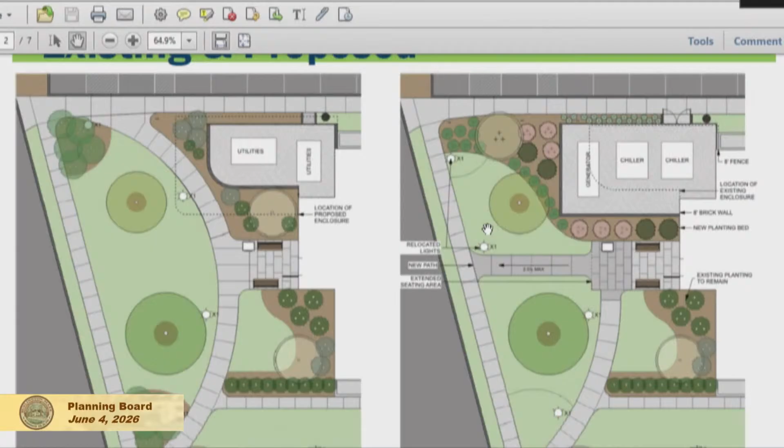The generator is currently up against the building. If it were to remain there, we'd have to bring an exhaust standpipe all the way past the roof line. If we flip-flop it with the existing chiller unit, which is in the brick enclosure right out by the side door, we're far enough away from the building that we don't need an extended exhaust pipe, and we can keep all the equipment hidden.

Knowing the equipment and code sizes changed, we realized we either have to increase the size of the enclosure or try to relocate one or more pieces of equipment elsewhere to minimize or keep the same enclosure space, or shrink it. So we did try to look at moving the generator.

The only viable option we could come up with is out back in the rear of the parking lot. However, there were some impacts with doing that. We would lose several parking spaces, but the main driver is the increased sound to the neighboring residents. We had a sound test done with the existing generator to measure the sound levels out back, to see where it would make sense to relocate it if we were to move it there.

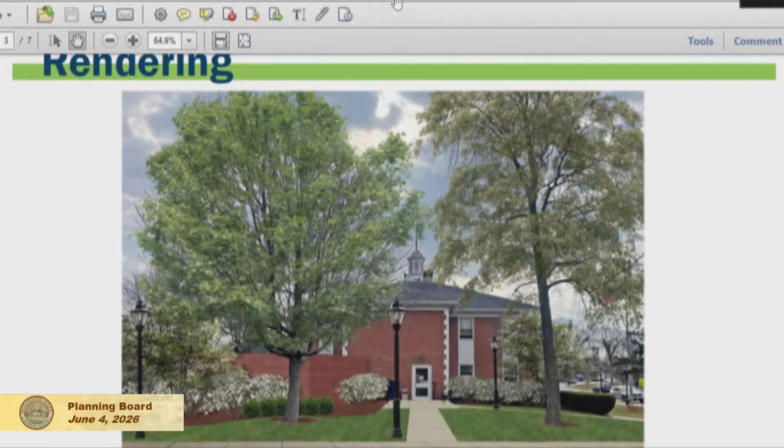Currently, the sound levels at that location are about 50 decibels. If we were to move the proposed generator back there, the new generator at that spot would be about 75 decibels, roughly a 20 to 25 decibel increase, which is actually 4 times as loud. For comparison, the difference from 50 to 70-75 decibels is roughly the difference between moderate rain and a vacuum cleaner. So it's a pretty significant increase in sound.

Because of that, we resorted back to what we think is the most logical place that impacts residents the least: keeping it where it is and increasing the size of the enclosure. The enclosure itself—obviously there's a walkway right up against it, so there's not much room to move it closer towards Center Street because of code restrictions with where electric panels are and whatnot.

If we go to the other direction, it's right up against the sidewalk back here, so we would be taking away sidewalk or encroaching into the parking lot.

So really the only direction to enlarge it is further out closer to Dearborn, and that would impact the walkway that leads from the chair ramp at the parking lot to the side door.

So we looked at a couple different options. One option, which would be more ideal for accessibility, would be to try to keep the shortest path, relocate the sidewalk to try to keep it where it is currently, and wrap it around. If we were to do that, we would likely have to remove the large maple that's out there.

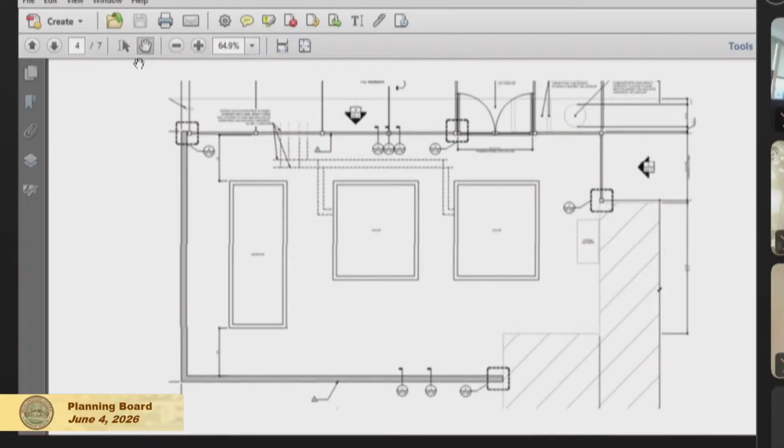Summarize it. We should probably introduce our landscape folks. Yeah, who do you want unmuted? Rory, please. Rory?

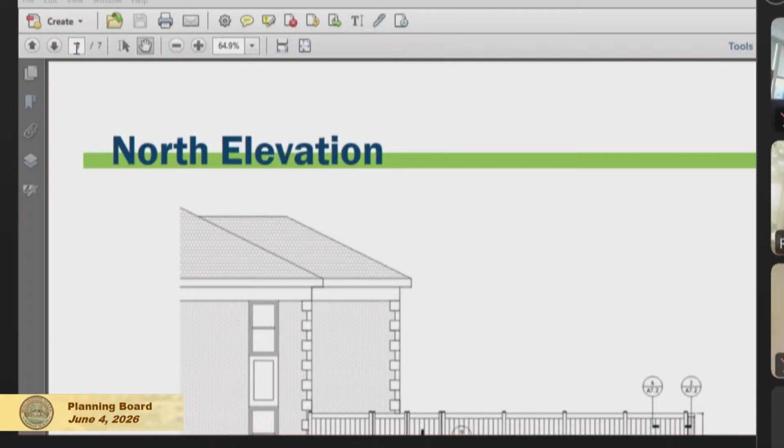Okay, hi, I'm Rory. I'm with the landscape architects on this project. If you want to go back so we can look at the two plans we have, I can just walk you through how we ended up at this design.

The most important things we wanted to preserve with this plan - we have the existing conditions on the left and the new layout on the right. As was stated, having the straight path, still an accessible path, access from the parking lot, and then a straight run to the side door entrance seemed the most logical, and that allows us to preserve that existing red maple tree, which is a very established and great tree.

That also gives us some space to add some additional planting to screen the large enclosure around the utilities. That planting will also help guide people to walk along the sidewalk instead of across the lawn, then straight to the side entrance.

So it's pretty straightforward, pretty simple. As far as the planting, we are just seeking to match what is existing, so this will all blend into the existing landscape as seamlessly as possible. And then we're just taking out some of the larger overgrown shrubs that are down at the corner of the sidewalk.

That's just a best practice thing to keep visibility at those intersections, and that's pretty much it as far as the landscape is concerned. We're just repurposing the lampposts that were along the old path and moving them to now be in line with the new path, which you can see in this rendering here. So I think that's about all I have as far as landscape goes.

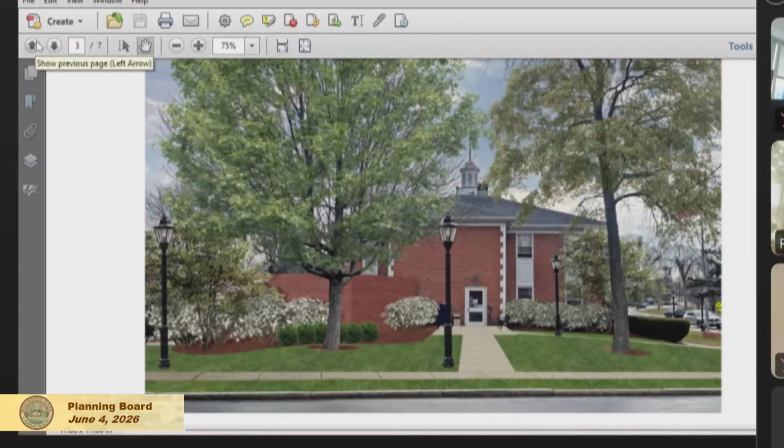One small thing to add: part of the reason why we are removing the bushes on the south of the plan is because those are invasive - burning bush - they're considered invasive, so that's why, even though they're not directly impacted, it's just best practice.

So it's again a pretty straightforward plan. One thing the board should be aware of is that this is in the town center overlay, and so there is a design component to this, and we've been working with Brian and his team for a few months now, and it's been really great collaboration.

I think they've come up with some really great materials, and the choices are really good. So if you guys want to talk about the materials and what you're planning on using.

Can I stop for a second? So what's the final rendering going to look like aesthetically, if I'm standing as a person not looking at one of these maps—which one am I looking at? Is it this? No, that's existing. I'll share it on screen. It's going to be the view, the third page in your packet.

Okay, so it'll be flush, like brick colored, comparable to the building. Okay, thank you. Yep, so we worked on two other design considerations.

For a while, without digging into the plans and existing site conditions, I wondered why there was a steel wall for the rear portion of the enclosure. Our initial intent was to try to make the whole enclosure brick to match the building as best as possible.

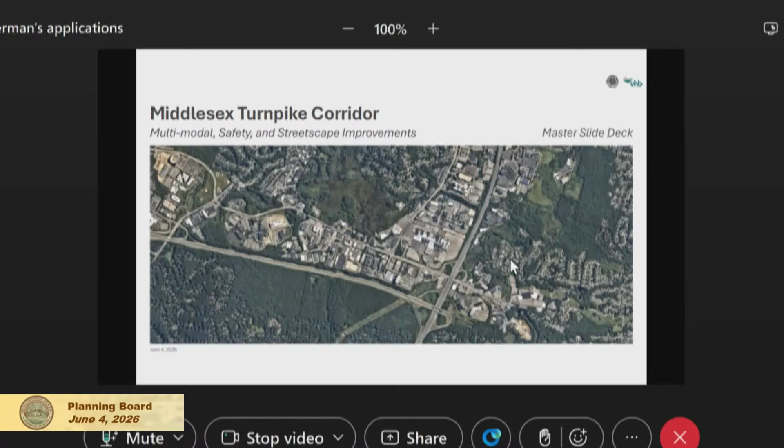With that, what we want to look at in terms of this project is really about the economic infrastructure that helps us remain competitive into the future. The roadway is not just asphalt. It is a public realm that can invite investment, support existing businesses, and help residents and employees get around, connected, have it more walkable.

So with that, today we have — I'll go everyone's first name on the VHB team real quick — we have Evan, Wayne, Jason, and Kristen, and a whole team that has been working really hard. I want to honor their work, because you'll hear a short presentation, relatively speaking, compared to the research and thoughtfulness that's been put into this effort.

What we're hoping for you guys today is, as you're thinking about this and hearing the ideas and concept, to consider: is this the right direction? Because we are looking for this document to set the stage so that we can use it for private and public investment going forward, whether it be grants or guiding development — that's what I hope we can bring to Burlington with this project.

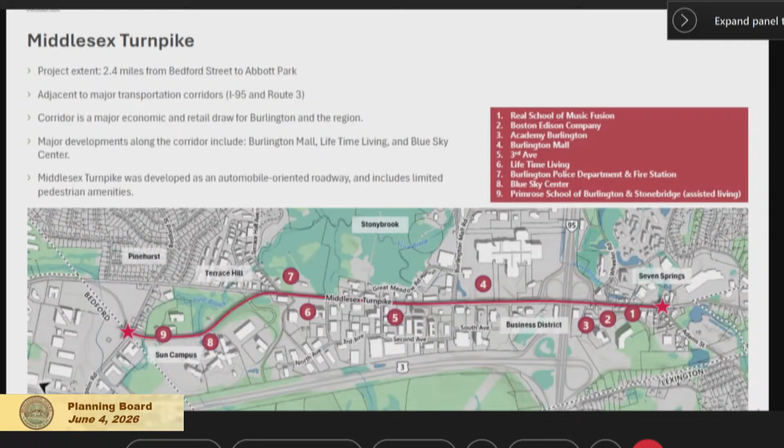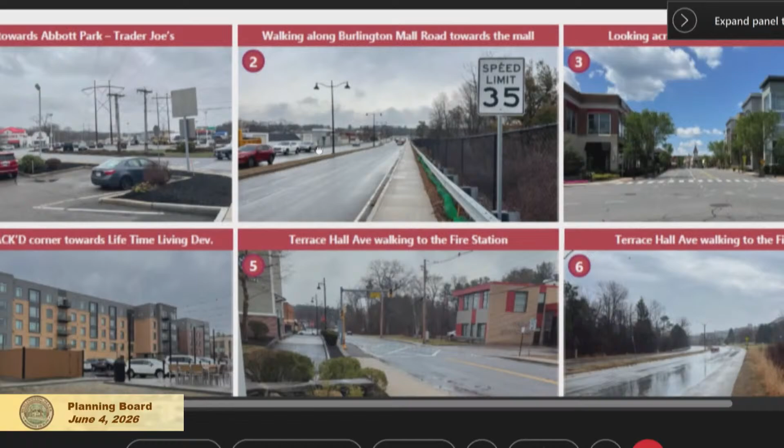The images on the screen show you just some of the current characteristics of the corridor. Points to the south are very confined, with a lot of curb cuts that occur down there, and limited walking sidewalks and availability for that. As we move northward, there has been some new development in that area. And then at the furthest points north, it really opens up and becomes much more natural in character than the urban core that's at the southern portion.

What we were hoping to do, our high-level goals, was to develop a unified vision for the corridor to inform decision-making around future investments and development projects. We want to identify a coordinated set of materials and concept-level roadway layouts that are feasible for Burlington to implement. We want to improve the experience and safety for people traveling by foot, bike, car, and transit. And we'd like to identify short and long-term actions and funding sources to help support the implementation of this project.

This was one of my favorite parts of this whole project, looking at the history of this corridor. This corridor, when it originally came out, was named the Turnpike. So for the longest while, it has been serviced as a movement of people — taking people from one place to the other as far back as 1805. It was created as a toll road from 1811 to 1841.

So this corridor has always been generating revenue in some capacity, whether it's moving people down the corridor or bringing people to a destination as a retail spot. The mall was established in 1968, which makes this start to touch the world — the larger capacity of the state is coming now to Burlington.

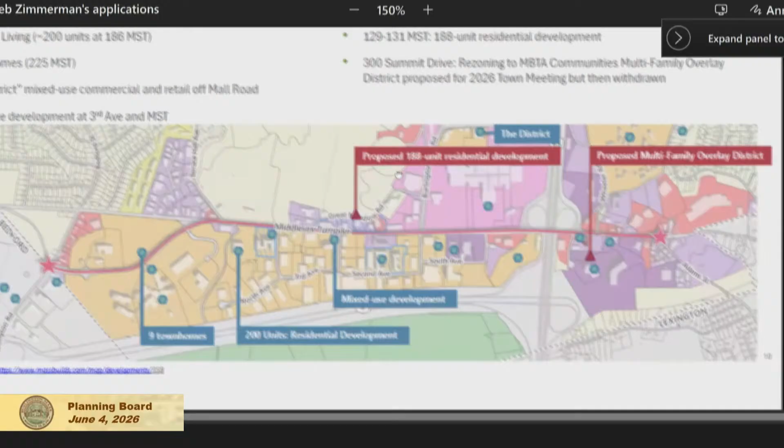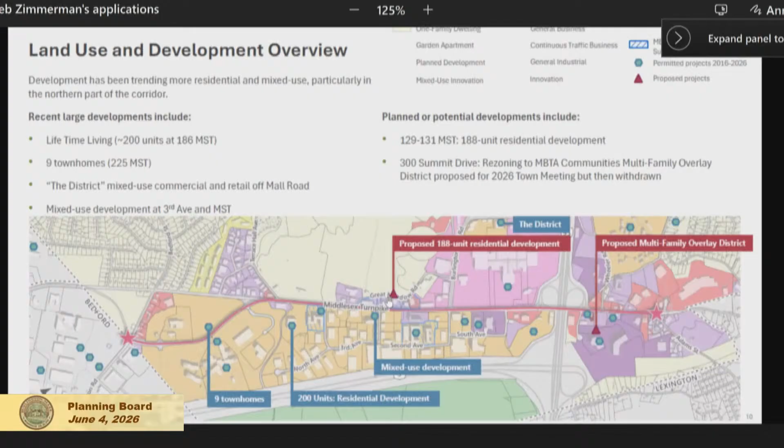The land use out here is currently changing, with a lot of residential coming into this area. Large recent developments include Life Time Living, 200 residential units that have come online, and 9 townhomes. The district, just around the corner, is bringing mixed-use commercial and retail off of Mall Road. We have a proposed 188-unit residential development just off Great Meadow Road, and a potential proposed multifamily overlay district just south of 95. So our once retail-based corridor is changing and evolving, and we want to allow this design to change and evolve with it.

There are some very interesting environmental conditions. This corridor isn't just about a road, but about the landscape it sits on. It's interesting how the slope and topography create, in some conditions, a confined corridor and an open corridor. In some places you have ledge and rock that creates an aggressive slope; in other areas there's a fall-off down to a wetland. That's what makes this corridor unique to Burlington—those environmental features we want to play up, because otherwise it's anywhere USA. Let's think about what makes it unique and play off of those in our design.

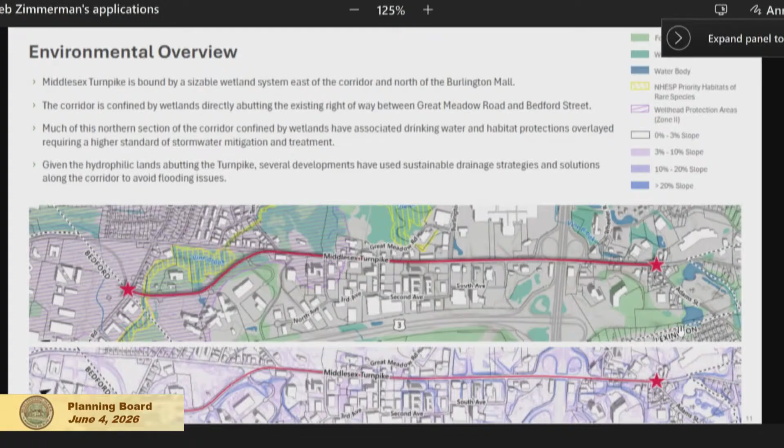Some of the environmental features currently out there include drainage areas, naturalized wetlands, forested areas, and the Vine Brook that comes through here. One of the things I was told early on is to take all your site photos in the wintertime, because any renderings you do will always look better in the end—so that's why these were all taken in winter.

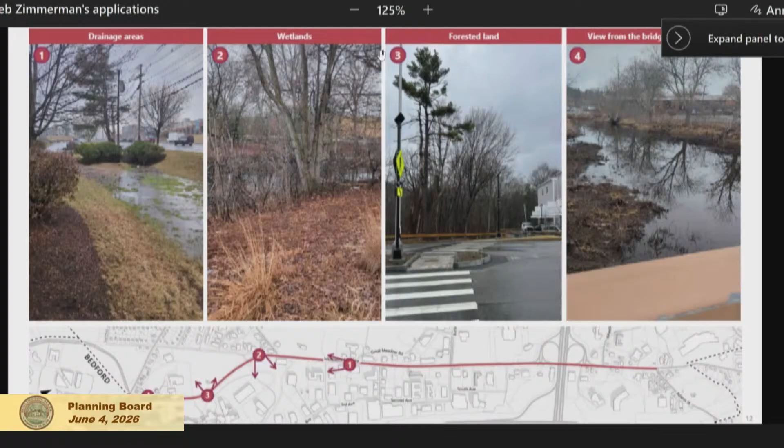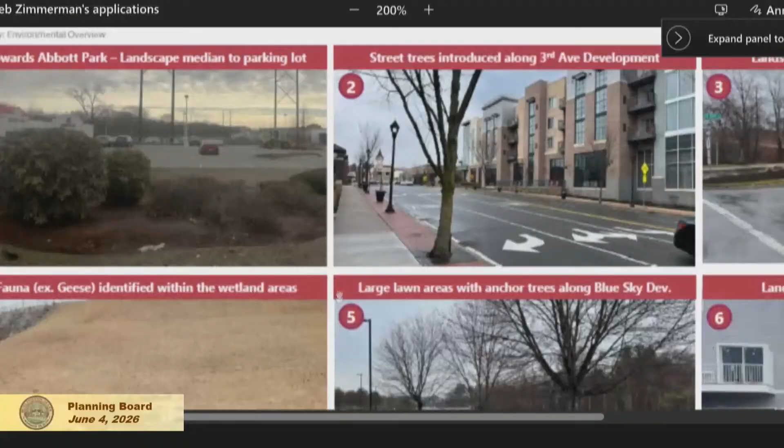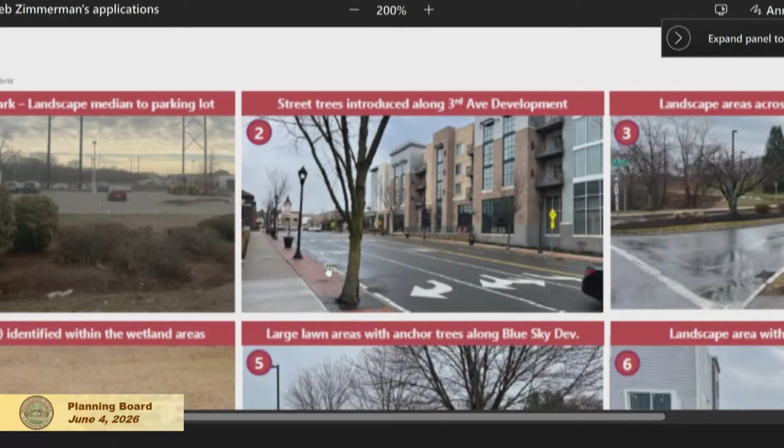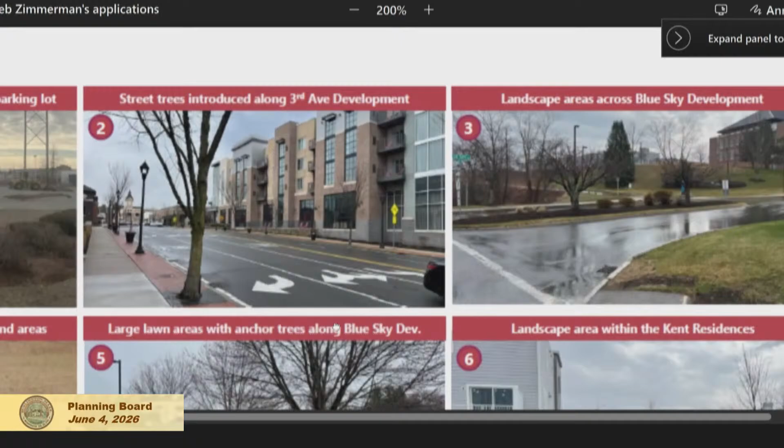These are also some great shots showing the character. Down towards Abbott Park, there are landscape medians in the parking lots. Street trees are starting to be introduced along 3rd Avenue. We have an area in the northern portion with geese—so we actually have natural fauna and animals out here. Large street trees help define areas along Blue Sky Development, and there's some really nice new landscape at the Kent residence.

The other nice thing out here is there's an existing transit network. When you think about buses and transit, that's also a gateway point. So it's not just the vehicle bringing people from one side to the other—when you get off a bus or get on a bus, you have to think about where that person is eventually going, what the infrastructure and sidewalk look like, and the opportunity to introduce them to this corridor and to what it means to be Burlington. So we've inventoried and analyzed that.

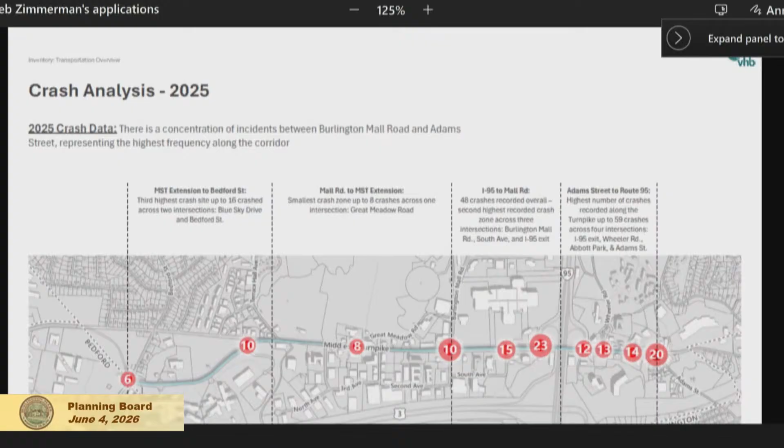We also looked at the crash data in 2025 and really saw that south of Burlington Mall Road, there's a high number of vehicular crashes that occur down there.

Legibility and creating a hierarchy to intersections, making it obvious to the car and the pedestrian where people need to cross when approaching an intersection, can help reduce crashes and improve safety. Part of this is providing a design framework that will help reduce those crashes.

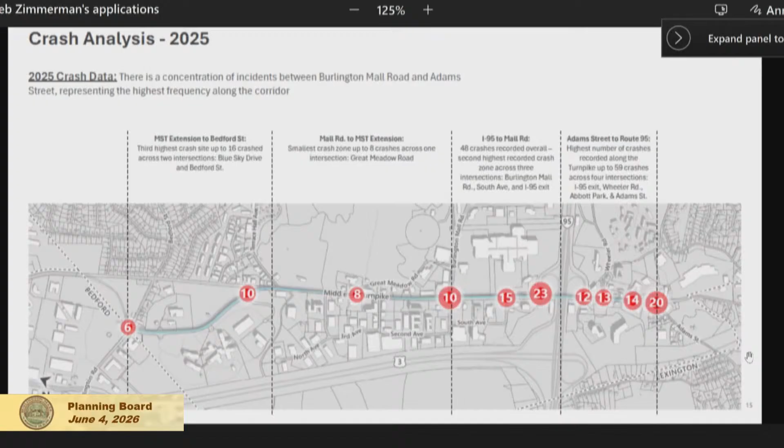The traffic analysis we've looked at shows about 25,000 cars per day south of Wheeler Road, and almost 20,000 cars per day north of Middlesex Turnpike. That's an incredible number of people moving along your corridor that you can take advantage of. It's an opportunity to really let them know what Burlington can be in the future, and what it means to be in Burlington.

We've also looked at the speed along those areas and the volume of cars across time. What we noticed is that the morning and evening commutes start relatively early, which is why lighting, not just for vehicles but for pedestrians, needs to be considered, because in the wintertime it gets dark really early and light really late. So we need to consider what lighting looks like in and around that area.

We also looked at pedestrian volumes. In the summertime, we've got almost 700 people walking along those areas in the current condition of the sidewalks, and we'll show a few photographs of that. There are 71 bicycles, almost 1,000 buses, for total vehicle trips, including everything, of almost 300,000. That drops off in the wintertime, but it's not non-existent. There are still people using this corridor in the wintertime, so we need to design for all 12 months, all 4 seasons.

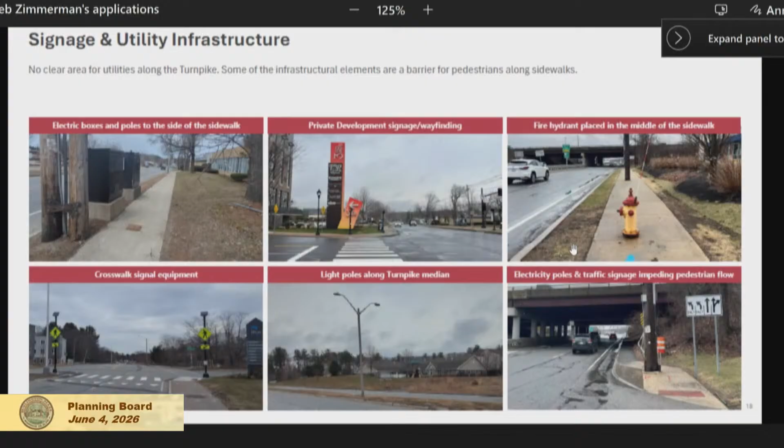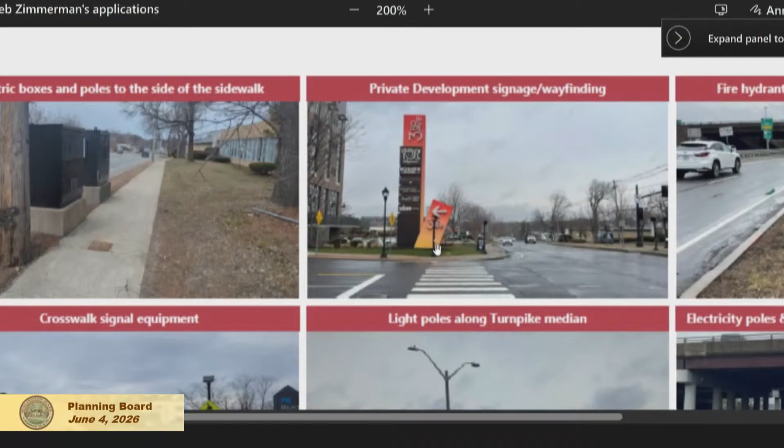We also did some inventory on the signage and utility infrastructure. There's really no clear place to land a lot of that stuff. It's sort of haphazard and dictated by whatever site design occurs at that time. So we'd like to formalize that and come up with a plan to put it in the right spot.

That led to all of that inventory, which we then analyzed as a group set, and we came up with 4 zones that we were really looking at. Zone 1 is south of 95 down to Adams Street. Zone 2 is 95 up to Burlington Mall Road. Zone 3 moves from Burlington Mall Road up to Middlesex Turnpike Extension and Terrace Hall Avenue. The final zone is Zone 4, from Terrace Hall Avenue up to Route 62, Bedford Street. Each one of those areas has a unique design to it.

When we look at designing into the future, you're going to see in our kit of parts a little bit of tweaks along the corridor, but there's going to be a common language throughout that whole corridor that makes it all legible as you move from one side to the other.

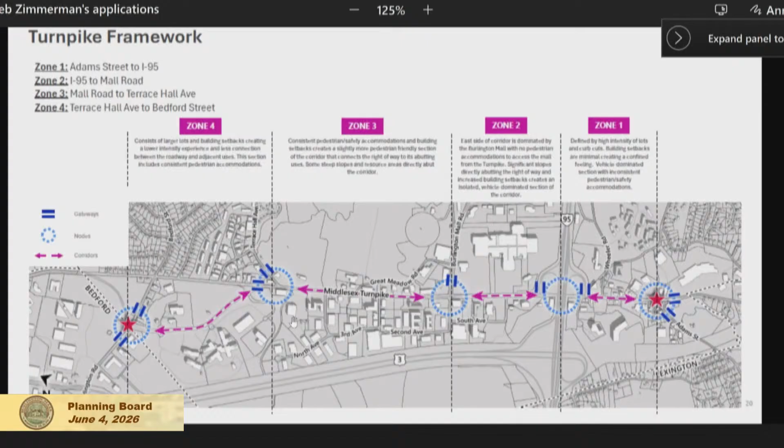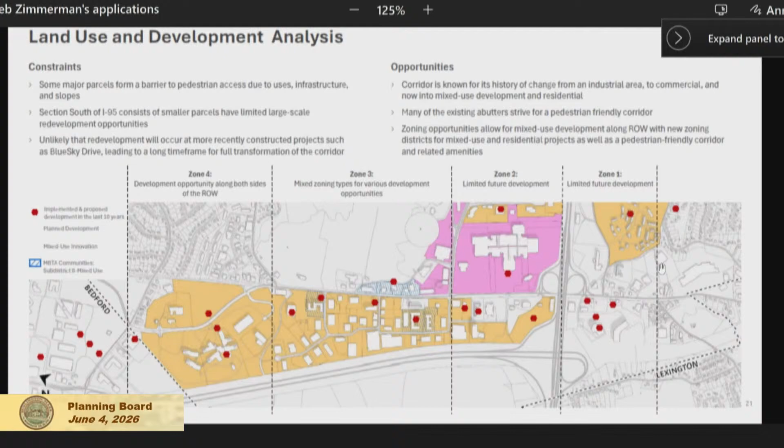We're just inventorying and showing some of the land use and development analysis that has occurred along here. Some of these parcels are large, but are constrained by uses, infrastructure, and slopes. But we have opportunities to play that up and really work with that, which we're excited about. There's also environmental impacts, like very steep slopes we have to deal with, and there's right-of-way currently under wellhead protection zones, all of which will eventually affect the permitting process through here, but we just want to acknowledge that it could also provide some very interesting ways to address that.

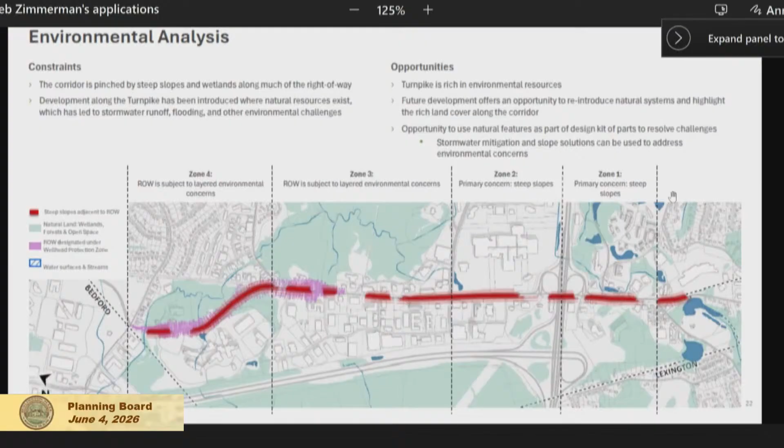And then we did our transportation analysis, which looked at crash speeds and how people are moving and crossing the streets, and where there's legibility for crossing in those zones.

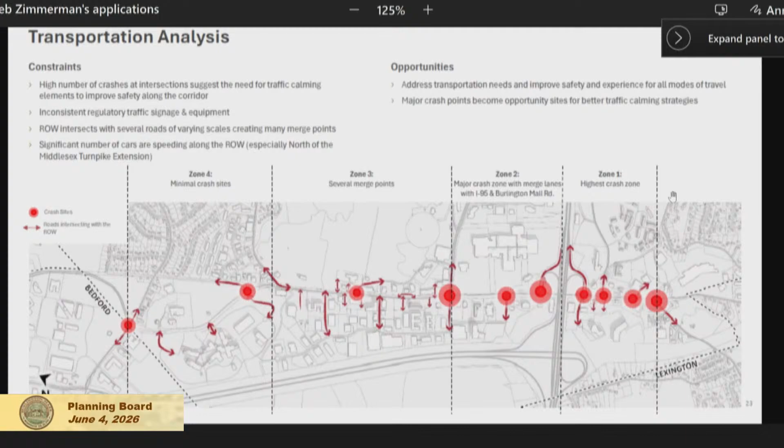We also noted that there's a lack of sidewalk in a lot of areas, especially on the eastern side of the corridor. So we really wanted to see if there was a way to solve that problem as well.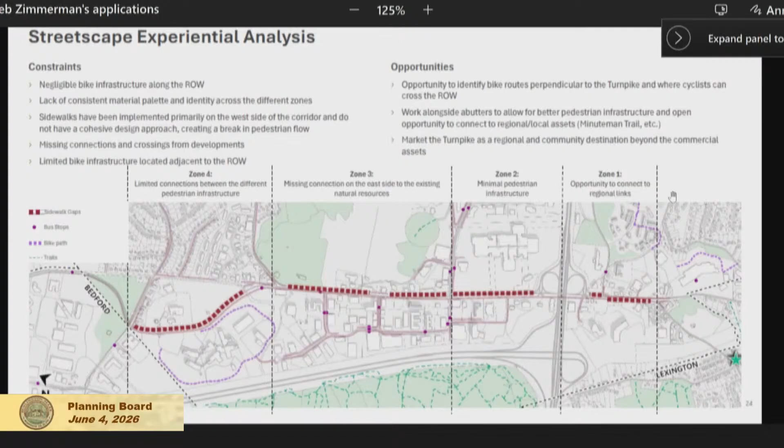That leads us to our master kit of parts, which is our vision over the next two decades for Middlesex Turnpike: to transform the turnpike into a distinctive parkway. I like using that term instead of turnpike - the idea of a parkway that seamlessly connects residential areas to thriving commercial centers through safe, pleasant walking and biking paths, integrated with existing roadway and the area's open spaces. This unique Burlington corridor will become more than a roadway, shifting to a vibrant green connector with recognizable character that enhances quality of life for residents, workers, and visitors, and strengthens Burlington's economic vitality.

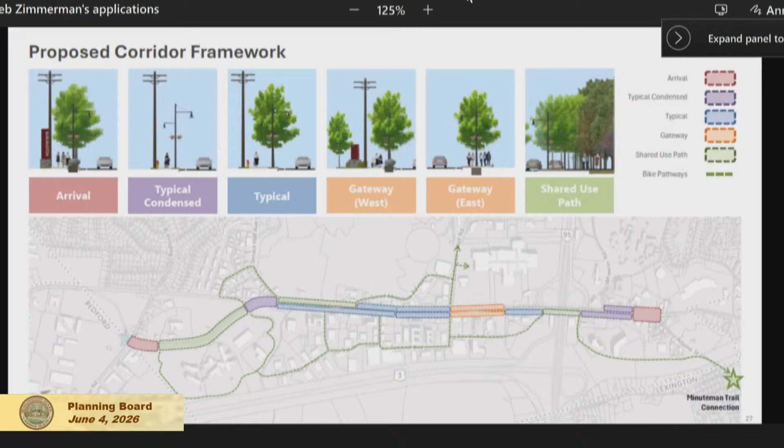So this is the proposed corridor framework. I've got some graphics up on the screen right now. We've looked at this in segments, and we've studied it in cross-section.

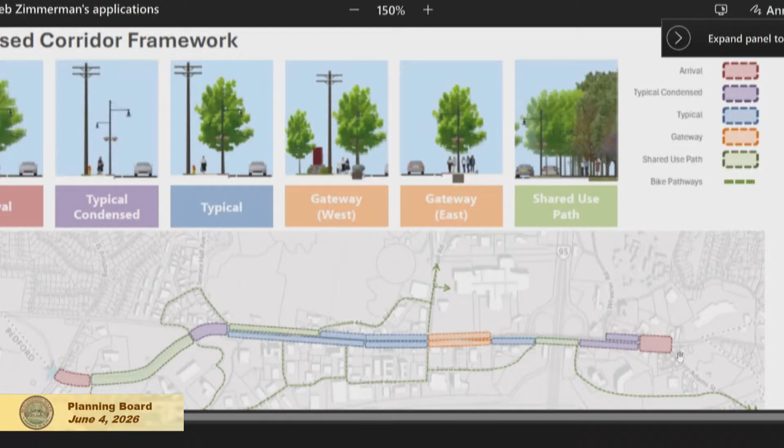At the two ends, at the northern and southernmost areas, we're proposing a cross-section that we call the arrival cross-section. We've been able to design within the existing roadway corridor, but adjusted the width of the shoulders slightly, and we may be encroaching in some areas into the existing right-of-way. What we'd like to set up is some level of gateway signage and a nice plant palette to create some level of passage - you've come into an area, you've passed through it, and then you're moving on to a different area. It establishes the start and the stop of the corridor.

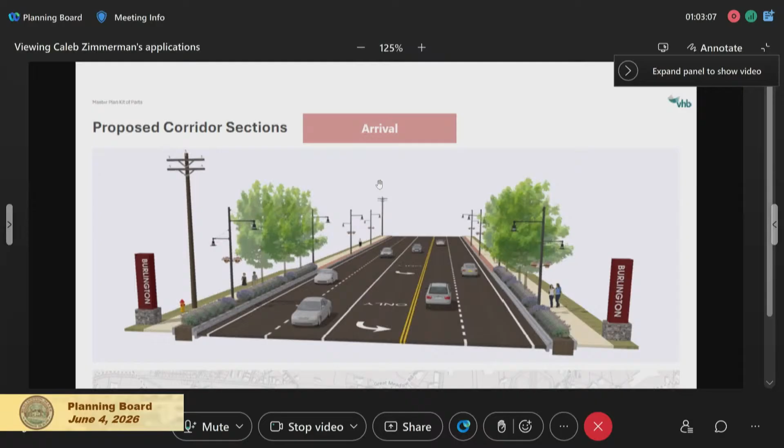In street section, what that looks like for the pedestrian: we're building off a 2-foot wide shoulder, a 5-foot wide planting area, a 6-foot wide accessible sidewalk, and now what we're calling a 3-foot wide utility zone, which in the future, instead of just having utilities fall where they may, we're proposing to dedicate an area that can locate all utilities moving forward.

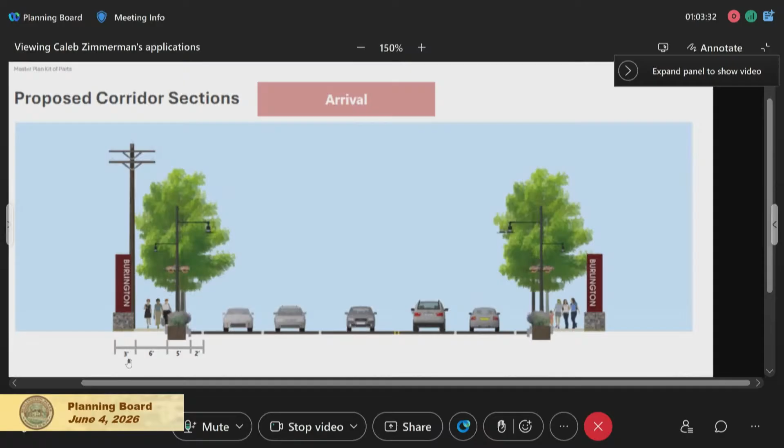As you move out of the entry area, especially south of 95, the existing conditions down there are very condensed. Your parking lots are right up against the roadway, the buildings are right up against the roadway, the slope comes up. It doesn't afford us a lot of opportunity to do extensive landscaping, but it still allows us to use the palette of materials we've come up with to create this consistent vision that moves along the entire corridor.

In this zone, we have slightly less space than in other areas. We still have our 2-foot shoulder, but we've reduced our paver area down to 3 feet. We're proposing a 5-foot wide sidewalk, but we still maintain that 3-foot wide utility zone that we talked about.

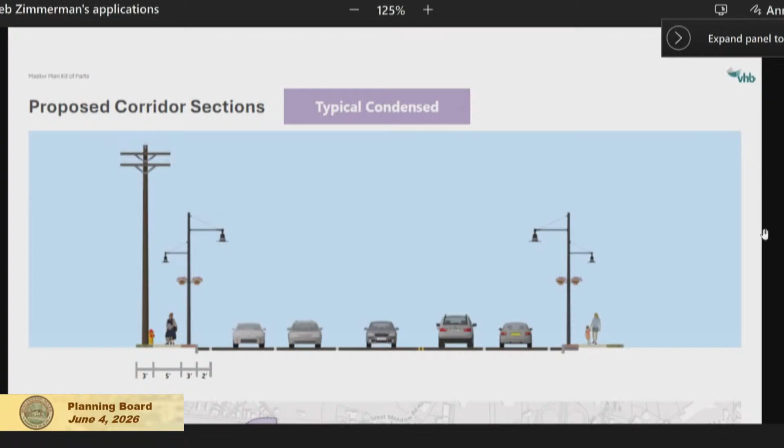Once we come out of that and get a little bit more space, we've created this as our proposed typical cross-section. What do we really want to see here? We want a great edge to the roadway defined by some level of paver or imprint concrete that gives the pedestrian a nice separation from the vehicles moving along. It also gives us an area to land lights, both for pedestrians and vehicles, and to plant our street trees, while also showing the 6-foot wide sidewalk and the utility zone, all while maintaining within the existing roadway corridor.

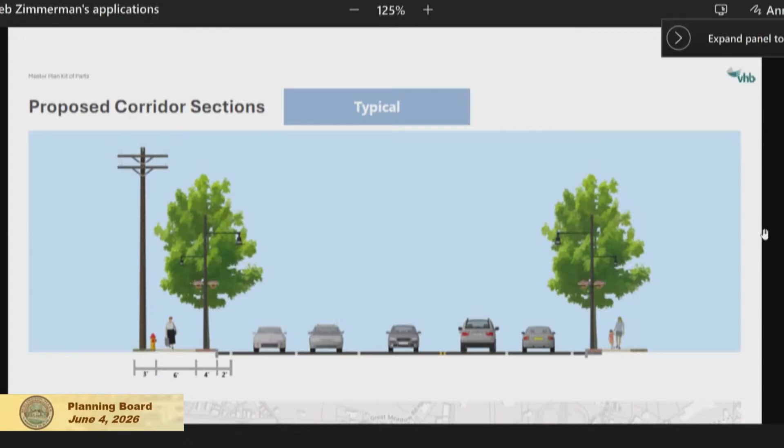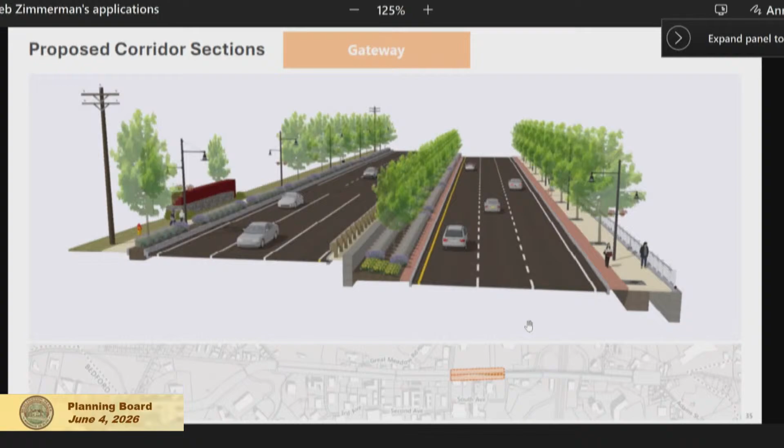This image is showing what that sloped condition can look like. It no longer needs to just be a simple asphalt slope with a retaining wall - you might be able to drop that, introduce some plant material in the center of it with another area for a paver band, which could also help with snow storage along in there.

We have two very distinct looking edges to the roadway. On the left-hand side, where the slope goes up to the movie theater, we're showing a 2-foot wide shoulder, a 5-foot wide planting zone, a 6-foot wide sidewalk, and an 8-foot signage and utility zone. On the opposite side, where the mall itself is, with a little bit of retaining, you might be able to create - where there doesn't exist a sidewalk today - a nice new wide plaza that would invite potential new development into that area, one that now engages the roadway instead of turning its back on it, which is something that currently occurs.

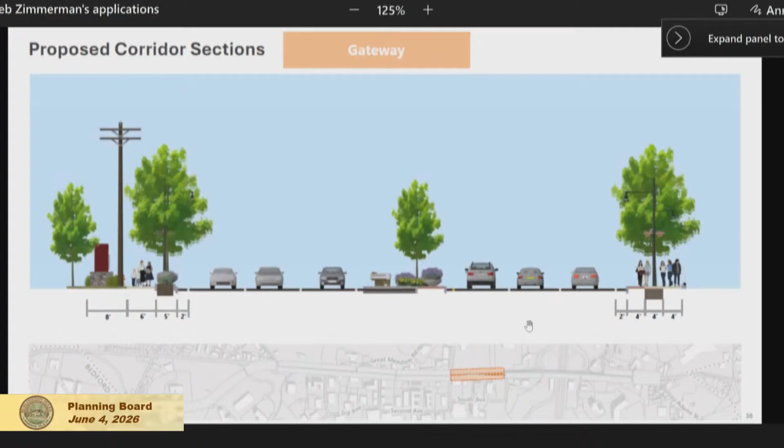As we move out of this corridor and continue northbound up near Blue Sky Drive and the campus up there, the character changes. We become much more environmental. There's much more natural landscape up there. So we've decided to potentially change what the look and experience is up there.

No longer are we binding the sidewalk to the back of curb, but we're taking a bit more land to create a mixed-use path that organically flows throughout that area on both sides. It would engage some wetland areas requiring additional permitting. But by providing a nice mixed-use trail instead of a traditional sidewalk, it would give residents in the surrounding neighborhoods the ability to come in, take advantage of the trail, and loop back into their neighborhoods, so folks not necessarily on the corridor could still utilize it.

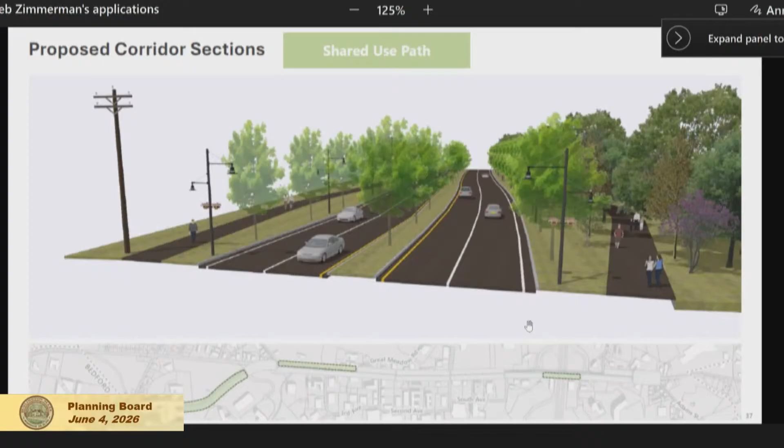We're taking advantage of the land, topography, and natural character up there to change the condition of that whole area. We're still maintaining that 2-foot wide shoulder, now with a nice offset from the road of 8 feet, a 10-foot wide mixed-use trail, and still maintaining our zone for utilities.

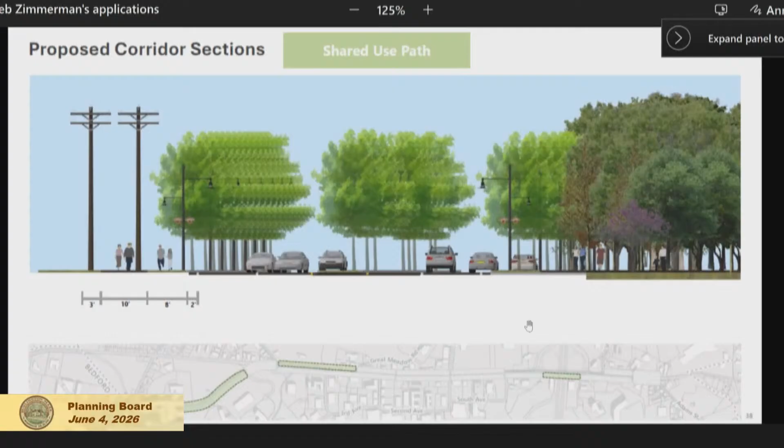Bikes are very important along here, but one thing I missed in the presentation: instead of trying to fit bike lanes right along the roadways, there are some great parallel roads on either side that we could encourage bicyclists to use for a much safer route, maybe going up 2nd Ave and coming back down.

But at some point, you're going to have to get under 95. So we've looked at taking the current sidewalk under 95 and lifting it up to widen it enough to make it a mixed-use path.

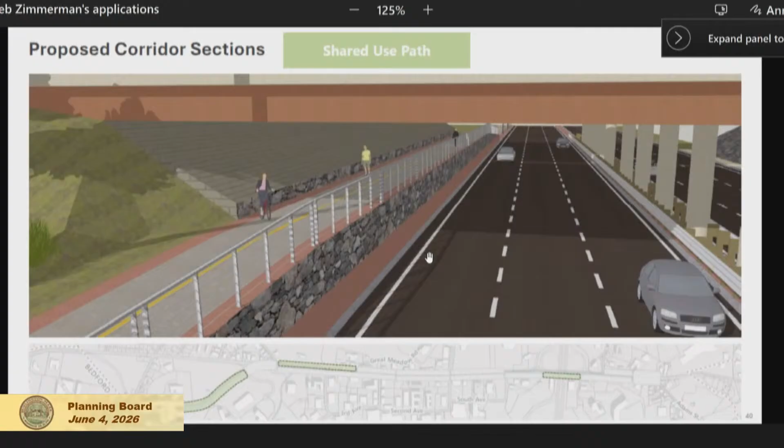What that could potentially look like is on the screen right now. By lifting it up and pushing it back into the slanted bridge abutment, it gives us a little more space to widen it to a 10-foot wide trail with 2-foot wide shoulders on either side, all while maintaining a 10-foot wide clearance from the bottom of the bridge abutment down to the top of the trail itself.

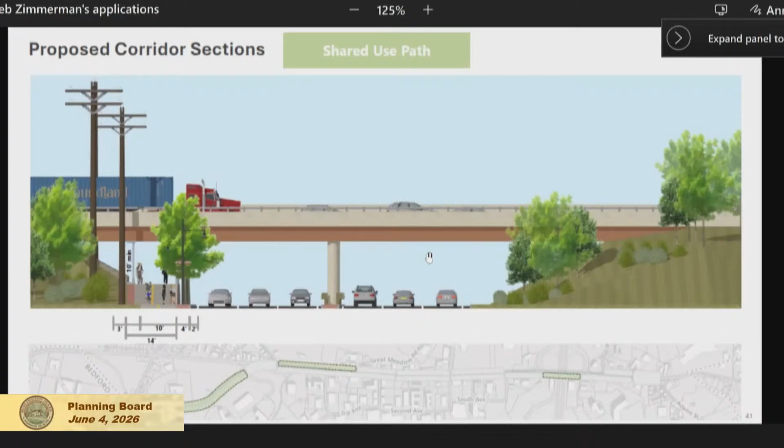Focusing on sidewalks is one thing, but intersection improvements for legibility to vehicles is something else we considered. We really looked at the Burlington Mall Road, 2nd Ave intersection with Middlesex Turnpike as the heart of this entire corridor. It's where you can come up and go down to the district or continue points northward, and we made this our Tier 1 intersection.

With great improvements to this area in material selection, tying it into the sections we designed for the roadway, it gives us the opportunity to create a there-spot for this whole corridor. It's indicative to the vehicle that you're entering a different space, one dedicated to the pedestrian, hopefully reducing some of those accident numbers we saw at these intersections. We'd then translate a portion of those materials to other intersections along the way, so there's legibility in materials and a hierarchy to intersections as you move up and down the corridor.

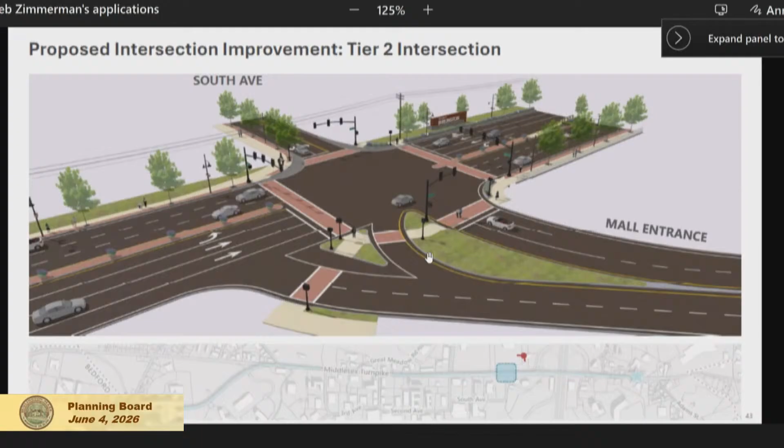So what does all this proposed design mean as far as impacts to the adjacent abutters? We've put these into three buckets: low impact, medium impact, and high impact, just to give the town a better understanding of what would need to be acquired or negotiated to move these projects forward. We've created an exhibit to inventory that for them.

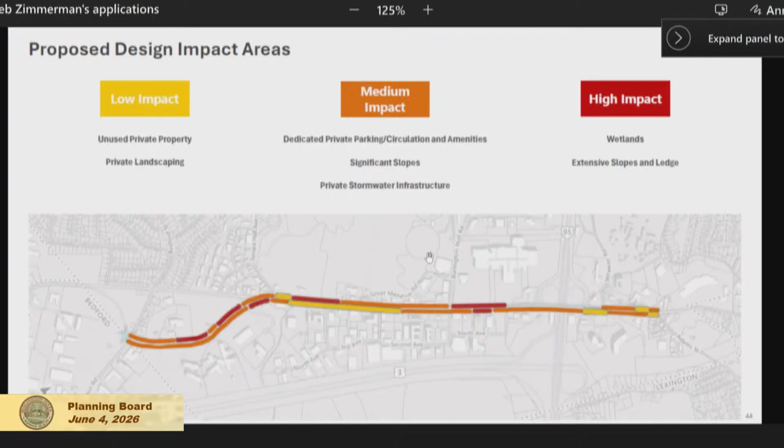The other great thing we got to do as part of this project was propose corridor signage and branding. We've come up with some potential ideas to help reinforce the fact that you've arrived in Burlington. We have a hierarchy of signs, starting with a long linear landscape sign that would occur across from the mall, at points along the slope from 95 up to Burlington Mall Road.

We have pillar welcome signage that would occur at our gateways, and directional and wayfinding signage that would all be part of a signage package to reinforce that this is a legible corridor along its entire length. And finally, character identifier and informational signage.

Those are some very interesting pedestrian level signs that could speak to some of the history of the turnpike itself, or the environmental interests along in here, but it's just something that could reinforce the fact that this is a unique corridor and special to Burlington.

I went over my time, I apologize. And I still didn't kick you out. Okay, thank you. Thank you.

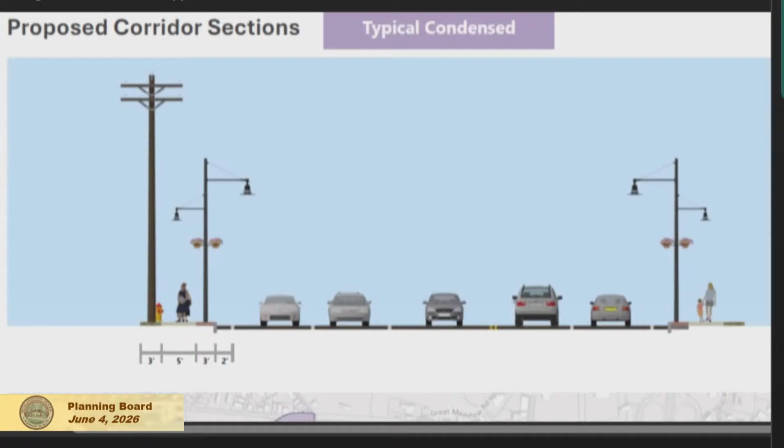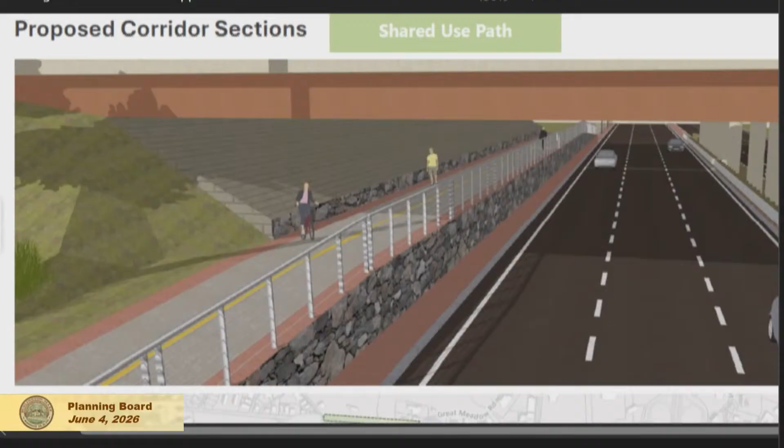My other nitpicky question was the shared use path underneath the overpass. I love how you have that, it goes up and there's the retaining wall and the people are away from the cars, looks lovely. Is there really enough room under there to do that without redoing the overpass?

We've started to look at the planning level, some potential finish elevations on the underpass abutment, as well as where the grade is, and we believe you could have a 10-foot wide clearance without getting into the design drawings. There's things we need to understand about that abutment to make sure this is possible, but conceptually the elevations are telling us we have the ability to lift that up, and we have the depth and the length to be able to make the runs to get back as well.

Okay, good, because that would be really nice to provide that safety underneath the overpass, because right now no one wants to walk there, really. So then, my main thing is how do we get there, and I have concerns about how we're going to pay for it. A lot of this looks like it would require takings of land.

I understand that part of that would be through the TIP program, but I don't know if they'd be able to fund takings of land. My other question, and I don't expect an answer, but I'm assuming this is going to happen in a piecemeal fashion, not all at once. So I have concerns that during that process there will be gaps. How do we deal with that? We don't want people walking down a lovely sidewalk and then having it just end, dumping them onto the street where it's unsafe. So how we deal with the gaps during this long period is of concern to me.

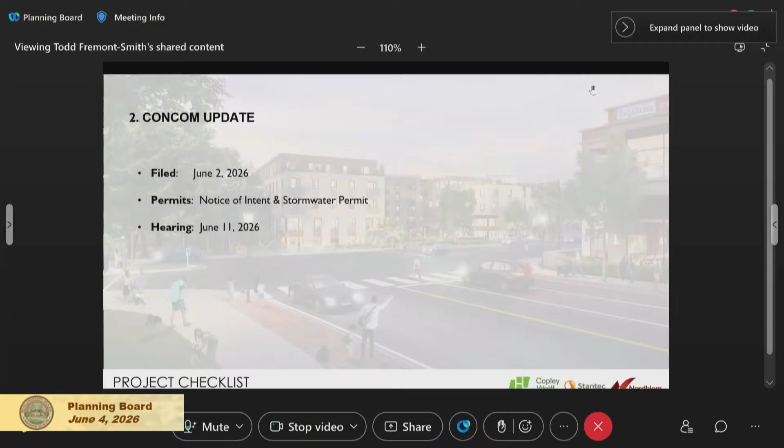Concom, the board asked where we were, so we just recently filed for notice of intent and a stormwater permit, and our first hearing is June 11th.

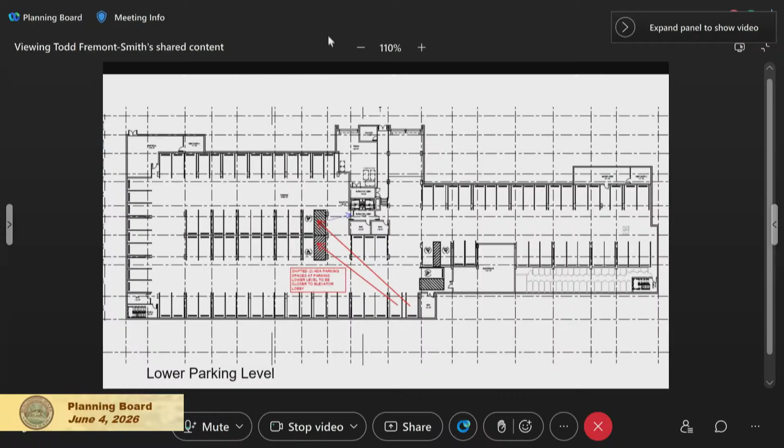The board asked about ADA, and actually the staff was asking why some of the ADA parking spaces were so far away from the elevator core, and where are the EV spaces, the electric vehicle charging stations. So on the lower level of the garage, we moved the 2 handicap spaces from the outside wall right to the core. And on the upper level, we moved 4 spaces closer to the core, closer to the elevator, so if you need a handicap space, you can get very quickly to the elevator.

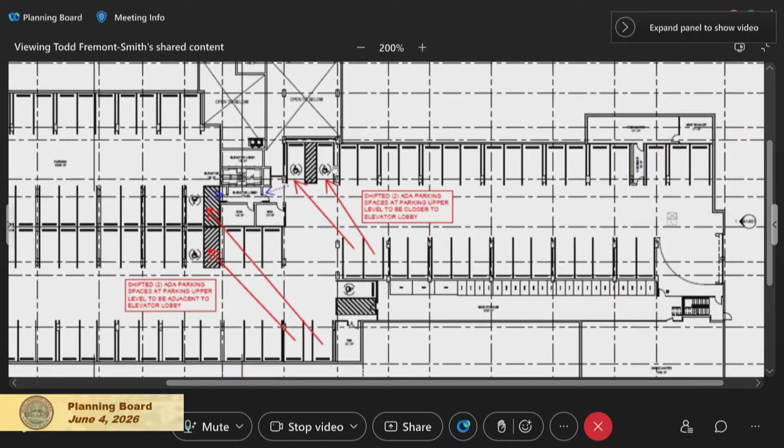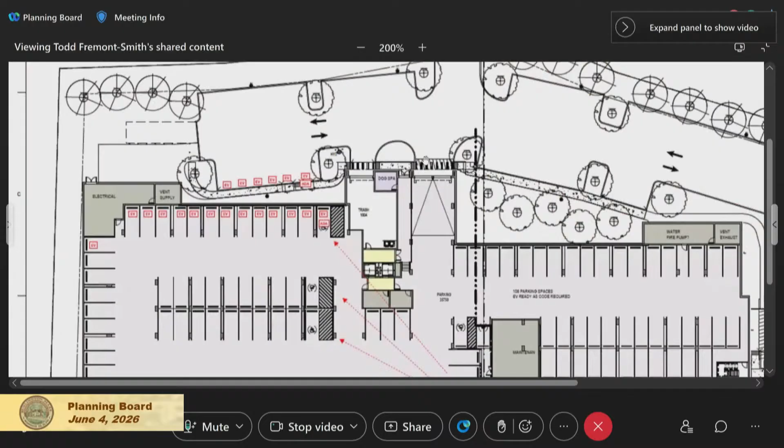That was a good catch. On the electric spaces, the development agreement says we need 20 electric charging stations in this building on day one—we're planning for more. I personally think electric cars are still coming; I think they're pretty cool. So we've got a bunch in the garage—you can see the little top plan, top left, the EVs called out—and then there are some outside the building as well. These are all right near the electrical room and near the transformer, so that makes it easy for us to wire.

Transformer screening and electrical meter locations was a question from the board. I did confirm that all electric meters are inside the building, and there'll be no bank of gas meters because all the individual units are all electric under the current building code.

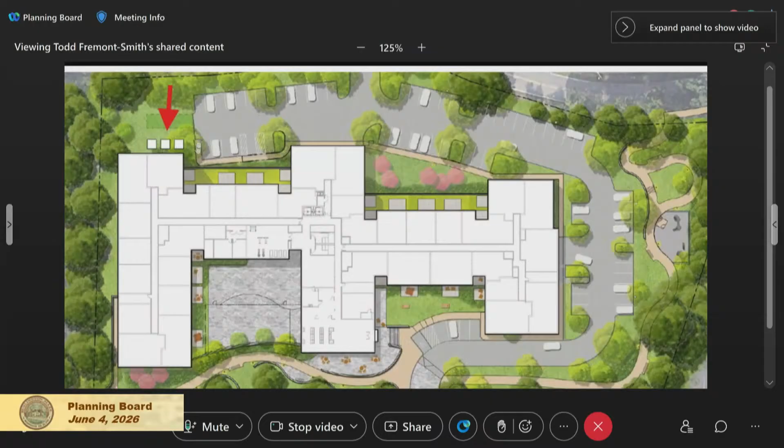As for the transformer locations, as we showed you last time, the arrow on the plan shows the top left on the Great Meadow side—this is where the transformers go. We'll work with staff to screen them as much as possible. There are regulations about putting bushes right in front of them, but I do think we can beef up the landscaping on the Great Meadow Road edge to block the view of the transformers and even the building itself.

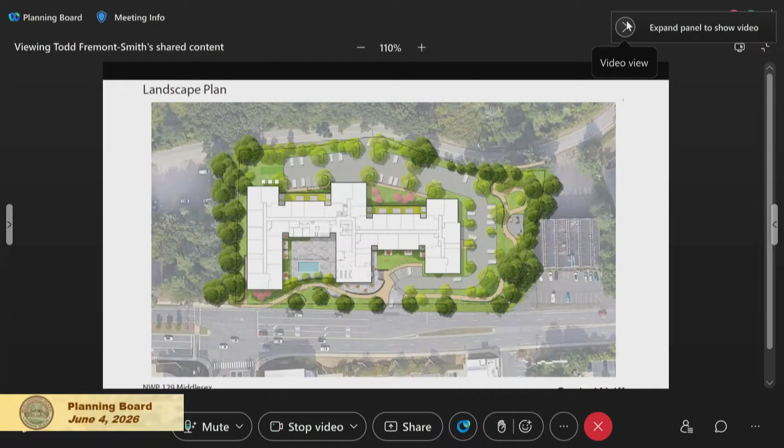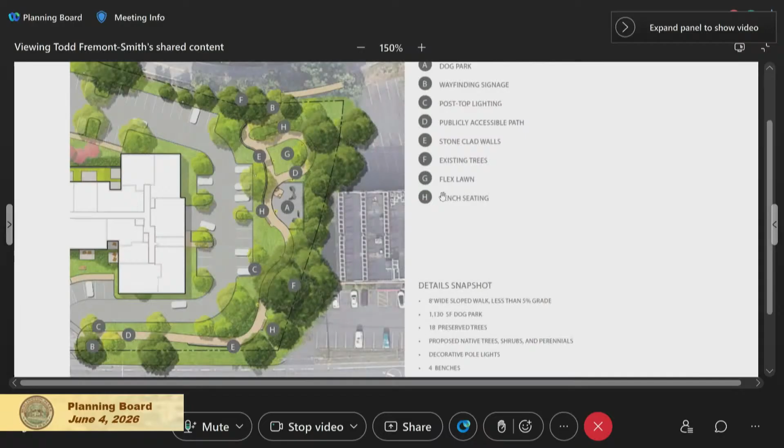As for the public pathway that goes from 3rd Avenue down to Great Meadow Road, we've hired Copley Wolff Landscape Architects to do this entire site. Copley Wolff is a full-service architectural design firm in Boston—they do a lot of wonderful work. There's another level of landscape architecture here, and this park will be elegant. There's real attention to the materials, the finishes, the lighting, the benches, and a public dog park on the way down this pathway—you see the little dog park marked 'A'.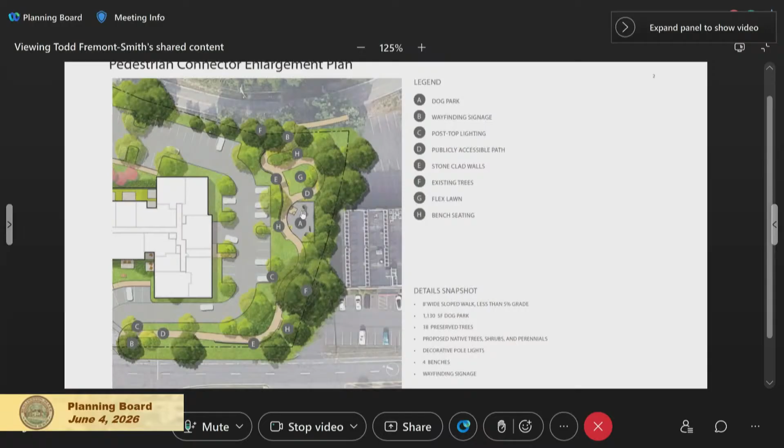This will be a very pleasant experience walking down from Northwest Park down to Tate. I was at Tate today again—it's such a great place, and there's other great food down there. So we are paying attention to the details—we've cataloged some of the birds and the butterflies and the bees that the landscaping is designed to attract and support. I saw one in my yard last week, so I believe you.

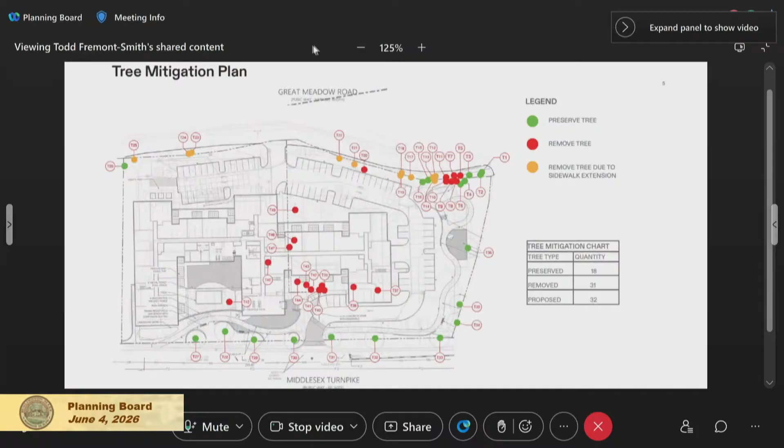We've cataloged every significant tree on the site—we know where every tree is. We'll be protecting the ones marked in green. Some will come down. The development agreement we signed with the town says that for every significant tree, I believe a 3-inch tree, that we take down, we have to put back two 3-inch trees or larger. So there's a formula involved, and he's saying 18 trees will be preserved. I'll double check the removals and proposed plantings with staff, but we'll follow the development agreement.

There was some concern from the board about facade lighting on the Great Meadow side of the building. The side facing 3rd Avenue can be jazzy, but the side facing the marsh really wants to be subdued, and it will be. We won't put any cornice lighting on that side of the building, and I was reminded that building lighting is installed with dimmers, so we engineer the lighting levels. We're using Lam out of Boston, a lighting engineering company, but the levels can be adjusted—even on 4th Avenue at Lifetime Living, those lighting levels could be adjusted if the community decides it's inappropriate. We did not do that on the first building, the Tremont—I went out there one day and it was like aircraft landing lights, so we had to go back and rewire the whole thing. We learned our lesson, and we hear the board that the building facing the marsh need not be lit up in a significant way.

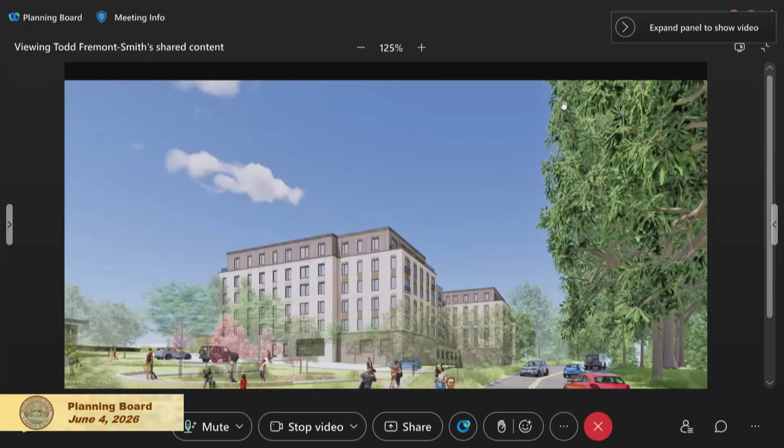That's just a rendering of what we showed you last time—the Middlesex Turnpike rendering. The board asked what the impact would be of removing the sidewalk along Middlesex Turnpike, so they quickly turned that green to show the intent. I think the board was asking for an actual update to the fancy rendering—if that's the case, we can do that. Copley Wolff is doing all the landscaping along the front of the building, so it's all going to be beautiful, as indicated in the original rendering, and we do like taking out that sidewalk.

On peer review, I met earlier this week with the staff to review the scope of the traffic study peer review that the board wanted. We're in agreement on that now, and I think these guys are going to get that out on the street.

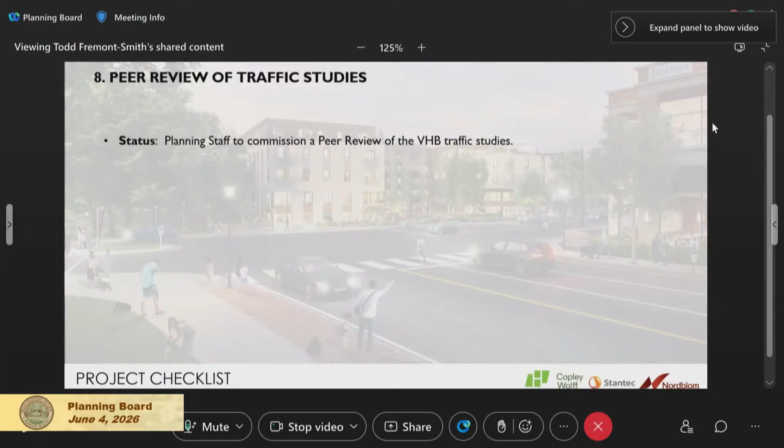We would ask that we go quickly with that, since it's one of the only outstanding issues that informs the work we're planning to do with the state if we get the state grant. Staff also reminded us we need to apply for a swimming pool permit and structured parking permits, which we will do. That's it.

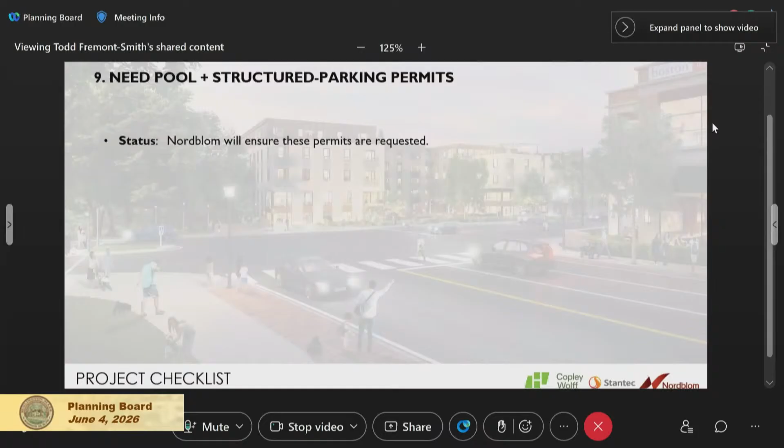Could I make one editorial comment? Sure, based upon what was said earlier this evening about envisioning the future. Pull the microphone a little closer. Oh, I'm sorry.

The presentation on the corridor that VHB made earlier touches the bases in terms of the policy objective, which is to get people into an environment along Middlesex Turnpike for pedestrian mobility. It also provides a nice world-class park, and as another board member noted, it gets people away from the street for that pedestrian walkway, so they're not tangent the whole distance. Finally, since it's a long-term project, we've agreed to do the plans if it ever comes to reality. The design plans that went in as part of the MassWorks grant give the state an idea of what the future may hold if others along the corridor participate, and how it all ties together. So from a policy objective standpoint, we think we've touched all the bases, or tried to.